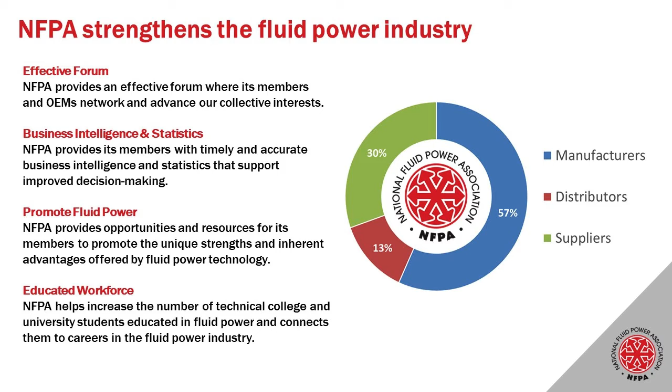Now, as I just mentioned, fluid power is a term that describes two related technologies, hydraulics and pneumatics. Both technologies use a fluid, either a liquid or a gas, to transform power into controlled motion, and it is a workhorse of the U.S. economy. Fluid power systems transmit more power in a smaller space than other forms of power transmission, making it the cross-cutting technology of choice for dozens of industries and hundreds of applications.

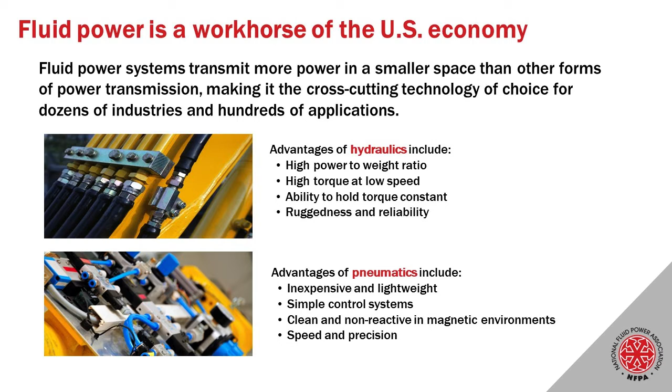Among its many advantages, hydraulics offers a high power-to-weight ratio, high torque at very low speeds, the ability to hold that torque constant, and overall ruggedness and reliability. And among its many advantages, pneumatics is comparatively inexpensive and lightweight. It offers simple control systems. It is clean and non-reactive in magnetic environments, and it activates with extreme speed and precision.

Because of these advantages, once you know where to look, you'll find fluid power just about everywhere. NFPA uses the social media hashtag #OnlyFluidPowerCan to educate the general public on fluid power's impact on their lives. For example, in aerospace, we can say, 'Only fluid power can lift a jumbo jet, bank and roll a fighter plane, and keep a rocket on course.'

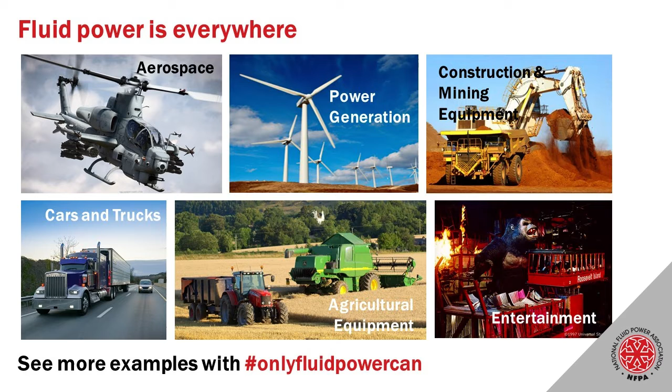And you'll see fluid power performing similar functions, moving heavy things with precision in dozens of other markets: power generation, construction and mining equipment, cars and trucks, agricultural equipment, entertainment, metalworking, utility trucks, factory automation, food processing and packaging, material handling, and biomedical are some of the major markets where you'll see fluid power in action.

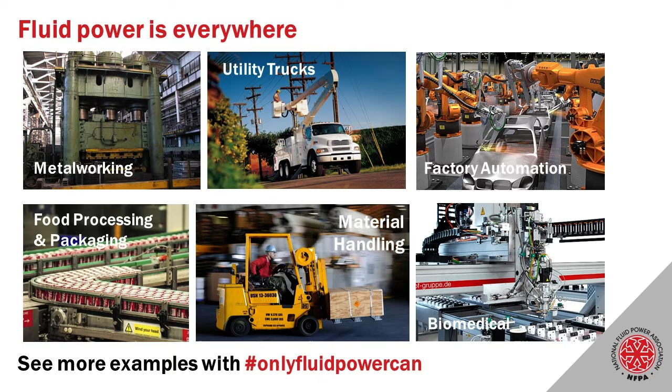It is this ubiquity of application that makes fluid power such a powerful tool. And so, for those who decide to pursue a career in it, there is always plenty of diverse and exciting things to do with this technology.

And here's what to look for. The next time you have a chance, look closely at one of those pieces of construction or agricultural equipment, and you'll undoubtedly see all the major components of the basic hydraulic system. Understanding a fluid power system means following the fluid as it makes its circuit, and the fluid is the most essential component of all.

It begins in the tank or the reservoir. From there, it is drawn into and then turned into pressurized flow by the pump, which sends it on to the rest of the system.

Most hydraulic systems first have a relief valve that allows overpressurized fluid to return safely to the tank. Otherwise, the fluid is sent through a series of control valves, which can direct the flow to the various actuators on the machine to do the work.

Here we see only one actuator, a cylinder, that can extend or retract depending on which end receives the pressurized fluid. Cylinders are usually the most visible component. Picture the long cylinders that lift the bulldozer's bucket and load into the air. But an actuator could also provide rotary motion to turn a wheel or otherwise propel the machine forward.

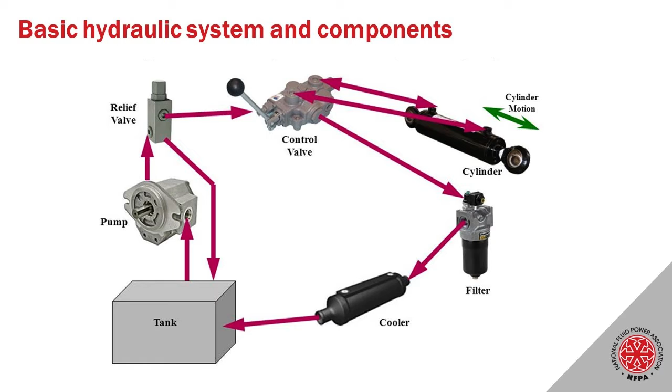When the work is done, the unpressurized fluid has to return to tank. But before doing so, it usually passes through a filter to keep it clean, and sometimes a cooler or a heat exchanger to remove any excess heat that has been built up. From the tank, the fluid starts the same circuit over again, returning to the pump for repressurization.

Your basic pneumatic system operates on many of the same principles, but usually even fewer components are used. The next time you're in an automated factory, look closely at the production machines, and you'll undoubtedly see all the major pneumatic components. Not shown here is the air compressor, which feeds the pneumatic system with the pressurized air it needs to function.

That air first passes through an air preparation module, sometimes called an FRL for filter, regulator, lubricator, which cleans, controls the pressure, and slightly lubricates the air to minimize damage to the downstream components of the pneumatic system.

Control valves are also used in pneumatic systems, which direct the airflow to the various actuators on the machine. And those actuators are almost always cylinders, providing quick and precise linear motion, extending and retracting depending on which end receives the pressurized air. When complete, the remaining air is usually vented safely to atmosphere, which is what makes the hissing sound associated with most pneumatic systems.

So when we talk about the U.S. fluid power industry, it is the manufacture of these components that we are talking about. The pumps, the motors, the valves, the cylinders, the actuators, and the hoses and fittings that connect them all.

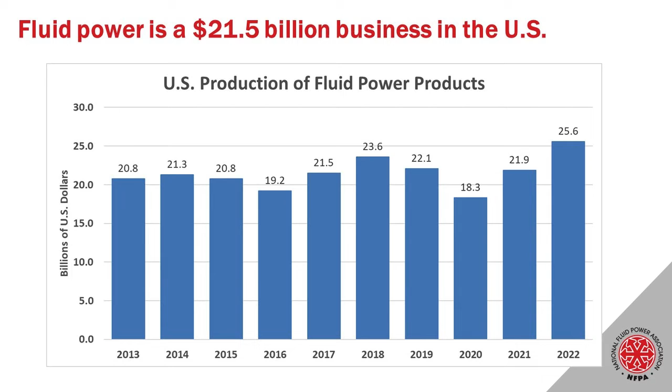We estimate that there are about 800 companies in the United States that make fluid power products, and several tens of thousands of companies that make machines that rely on fluid power products for their operation. And one thing that all those companies have in common is the need for workers, especially workers who are educated in fluid power. NFPA members consistently tell us that this is among the most challenging issues that their businesses are facing. And that's why we've invested so many of NFPA's resources in bringing fluid power education and activities to schools around the country.

When we ask our members about the positions that they most need to hire, this is what they tell us. They need design engineers, people who can design fluid power systems and components, as well as develop new concepts, applications, and improvements of existing installations.

They also need sales engineers, people who can market and sell fluid power systems and components, working closely with fluid power manufacturers, distributors, and customers.

They also need mechanics, people who can assemble and install fluid power systems and components, as well as troubleshoot and maintain systems on machines that are used in every facet of industry.

And they also need technicians, people who can operate the machines equipped with fluid power systems, as well as manufacture and test fluid power systems and components.

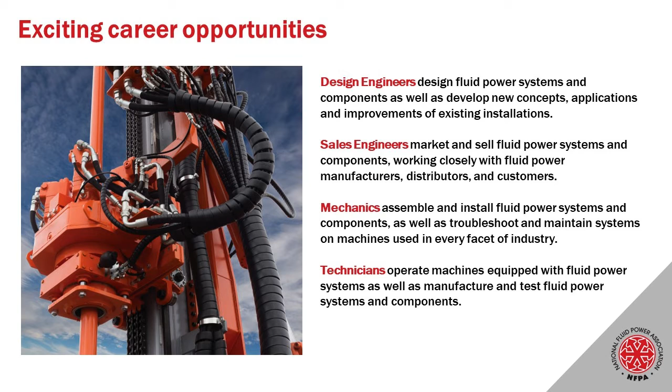And NFPA is doing its part to help develop a new, educated workforce for the fluid power industry. Through our charitable foundation, we are working with schools across the country to grow the number of students being exposed to fluid power and receiving industry-validated fluid power instruction.

Right now, this network of educators includes schools in 27 of the 50 U.S. states, and they scale across many grade levels. We have 228 middle schools, 164 high schools, 102 technical colleges, and 90 universities, all working with us to bring more fluid power to their students.

Spanning all those grade levels is important because as fluid power interested students move from middle school to high school and from high school into higher education, we can better provide education and recruitment programs that translate into workforce pathways for our industry. So stacking these programs within each individual state becomes key.

One of those stackable structures is Fast Track to Fluid Power. Fast Track is a workforce development pathway that connects local technical colleges with industry partners and with high and middle school teachers. The network creates awareness and interest in fluid power and continues to direct students along a path that leads to careers in the fluid power industry.

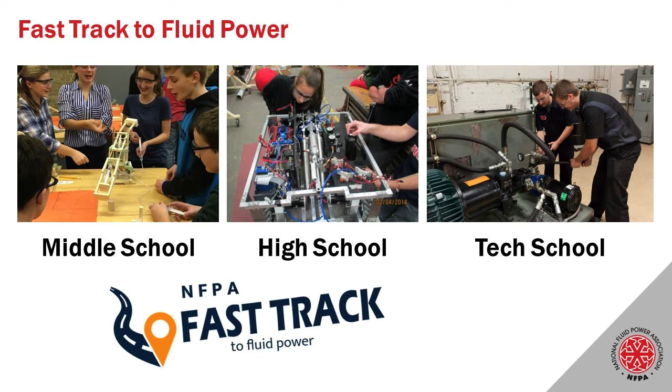Another stackable structure is our Power Partner Universities. These are 4-year schools that excel at teaching and connecting their students to fluid power instruction and career opportunities. To qualify, a university must consistently conduct 4 major activities. First, they must teach the fluid power competencies identified as most important for entry-level engineers by the fluid power industry.

They must have an undergraduate fluid power club on campus that meets regularly and connects students to fluid power resources. They must have a team participate in our Fluid Power Vehicle Challenge, a design-build competition that challenges students to build a human-powered fluid power vehicle. Finally, they must host an industry connection event on campus to introduce fluid power-educated students to companies in the fluid power industry.

When it comes to sourcing candidates for the design and sales engineer positions needed in our industry, NFPA members are increasingly engaging in these same activities at our Power Partner Universities.

These programs have created a lot of educational momentum for fluid power, and a big piece of that momentum has been the accelerating pace of fluid power research being performed in our nation's elite institutions. Truth be told, 30 years ago, there was very little R&D going on in the fluid power industry. It was perceived to be a reliable but mature technology with little room for advancement.

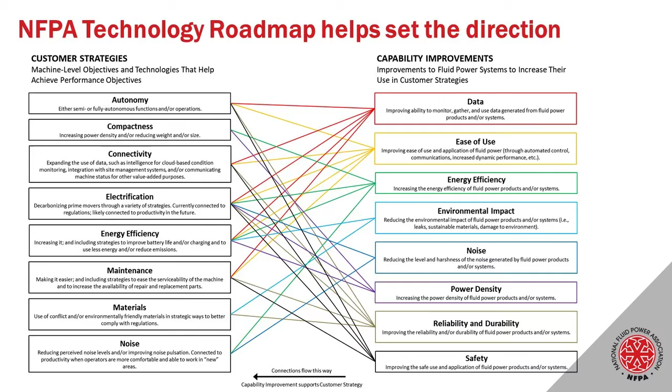Let me end by talking about just 2 examples of improvement trends, both of which are dramatically impacting the fluid power industry. The first is electrification. Fluid power is used in 2 primary settings, either in an industrial plant, where an electric motor is almost always the prime mover in the system, or on a piece of mobile equipment, where traditionally an internal combustion engine is almost always the prime mover.

What's happening now is that in an effort to reduce emissions from those internal combustion engines, they are being replaced with an electric power source, an electric motor, a battery pack, or some combination of those technologies. In many cases, the hydraulics that controls the actuated functions on the machine remains, because the machine needs the power density of fluid power to perform its tasks. But optimizing a hydraulic system to perform with an internal combustion engine and optimizing one to perform with an electric motor, especially in the confined and compact architectures associated with off-highway equipment, are two very different things.

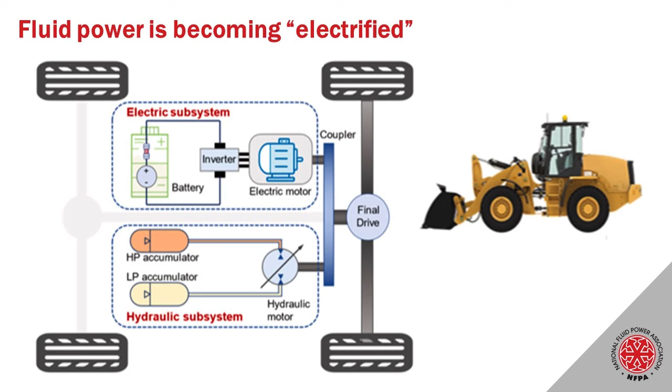The second improvement trend in fluid power is connectivity. The proliferation of sensors and internet-enabled technologies is hitting just about every industry. We're increasingly familiar with a whole slew of household products that we can now monitor and control from our phones, from doorbells to thermostats to refrigerators.

Well, all of the machines that use fluid power technology for their actuated functions are also utilizing these technologies. In fact, they started using them long before your doorbells and your thermostats. So much so that the entire technology trend is sometimes called the industrial Internet of Things. And those capabilities are now increasingly being incorporated into fluid power components and systems.

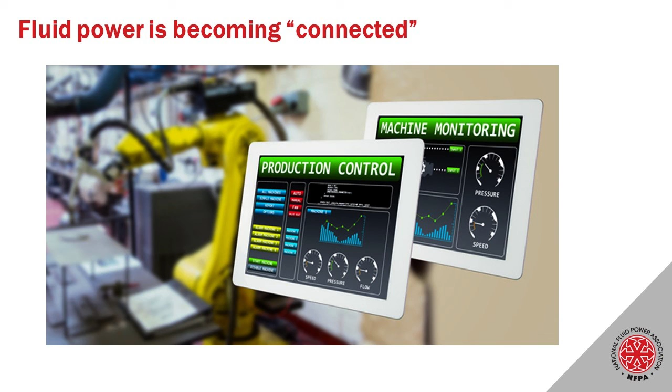For fluid power, that means knowing in real time things like fluid conditions, actuator positioning, component wear and life cycle, and then engaging in either predictive maintenance or automated control functions. Here, like electrification, our companies are developing new and innovative solutions to these challenges and bringing more and more intelligent and energy efficient technologies to their customers.